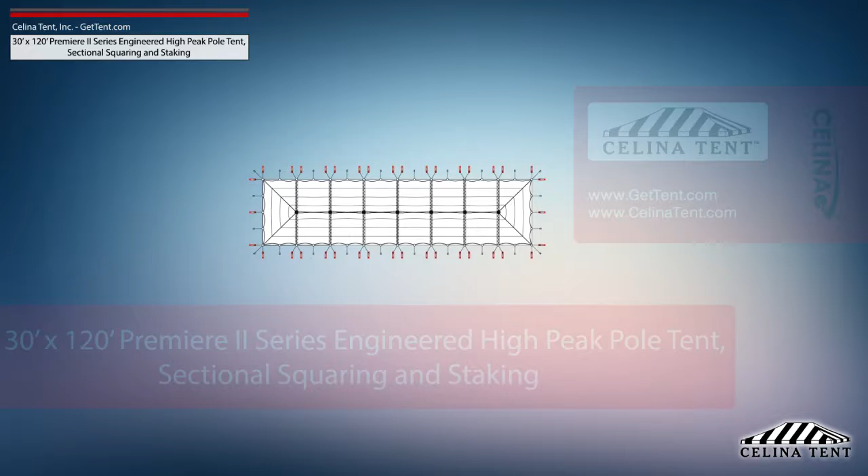gettent.com. This video covers squaring and 5-foot staking applicable to a sectional 30-foot by 120-foot Premiere II Series high-peak pole tent from Celina Tent. 5-foot staking is standard for tents with an eave height of 7 or 8 feet and would need to be adjusted for eave heights other than this standard.

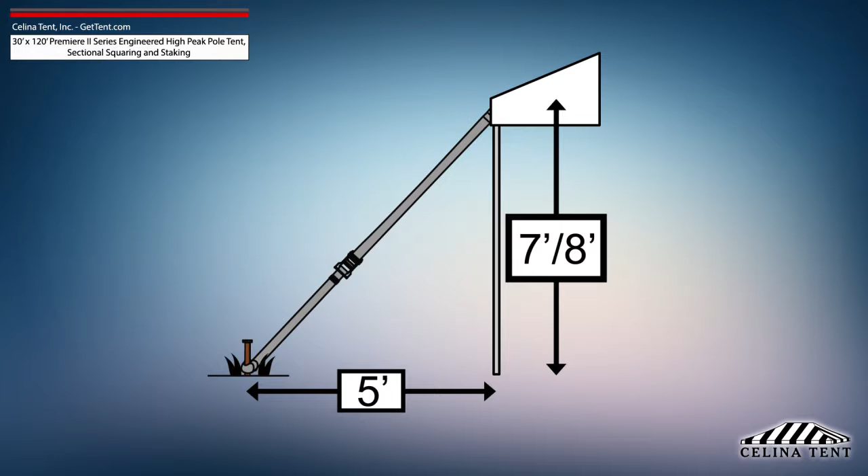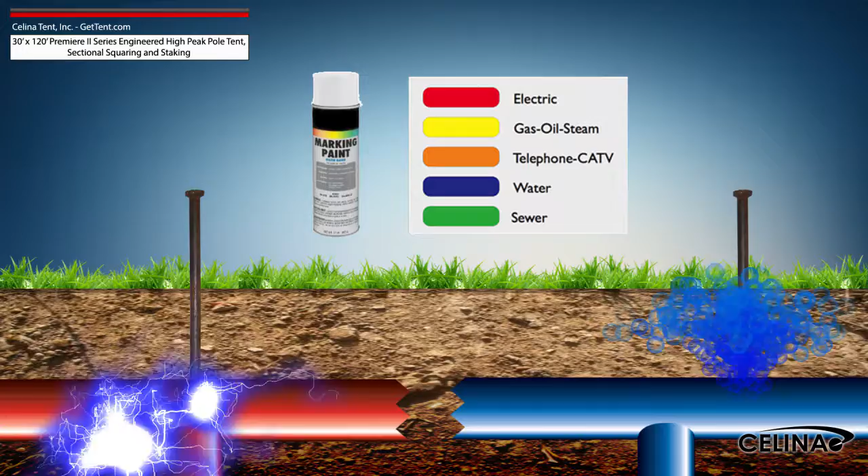Tent squaring allows the installer to accurately place all tent hardware and install tent stakes prior to beginning setup, and helps them avoid any marked underground utilities. Utilities must be marked by your state's local utility services prior to any tent installation.

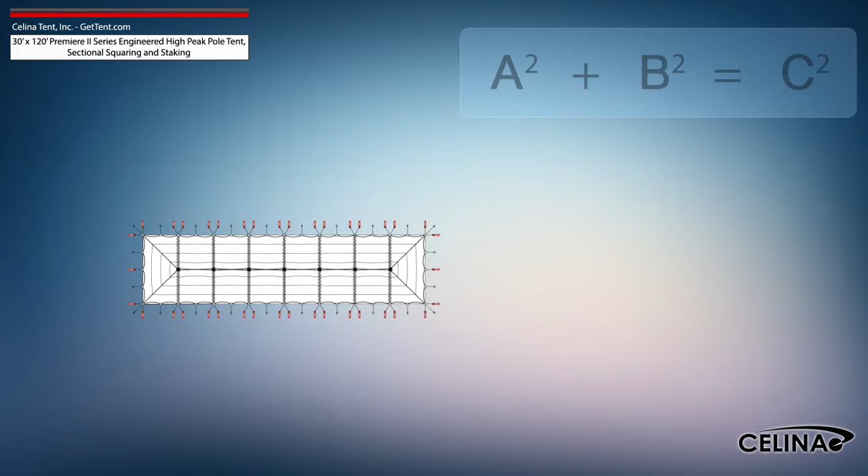Using the Pythagorean theorem and adjusting out for 5-foot staking, the entire tent footprint will be 40 foot by 130 foot, with a 136-foot diagonal length.

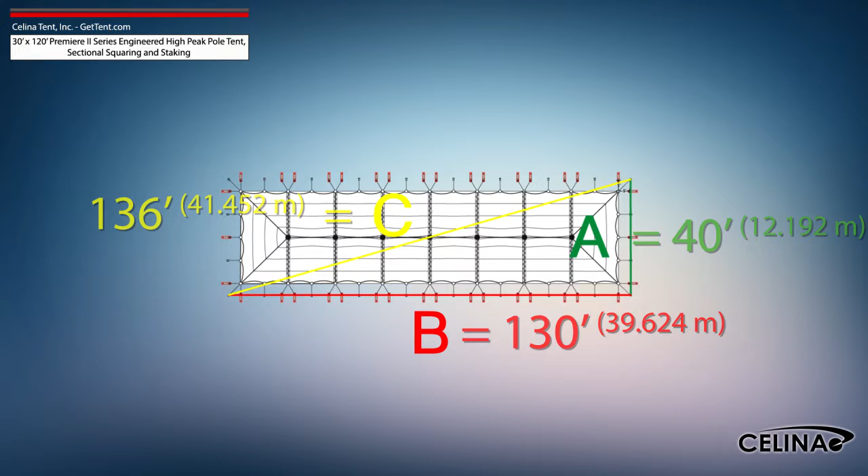Celina recommends that a 30-foot by 120-foot Premiere II Series high-peak pole tent receives a minimum of 107 stakes: 5 stakes and 2 stake plates for each corner pole, 1 stake for each side pole, 2 stakes and 1 stake plate for the side pole at the center of each end, 4 stakes and 2 stake plates for each side pole at lace line locations, and 1 stake for each center pole.

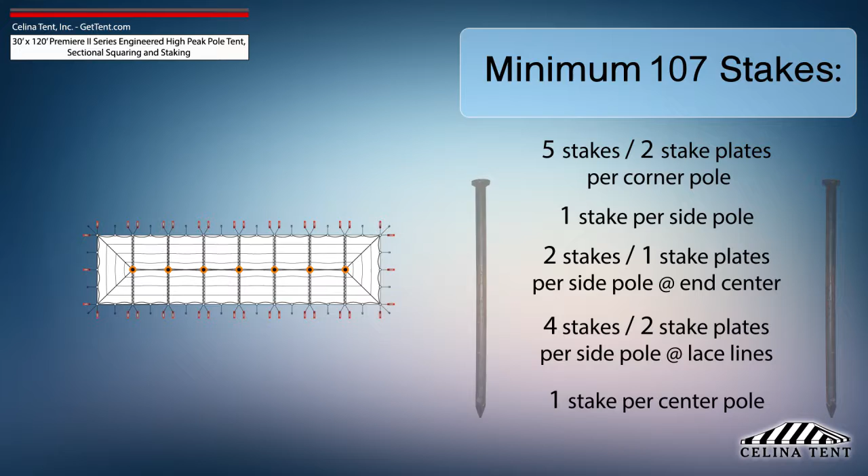This amount of stakes provides the minimum amount of security for a pole tent of this size. Additional staking is required for any site that doesn't meet optimal soil conditions. Tent staking is the most important safety procedure during tent installation.

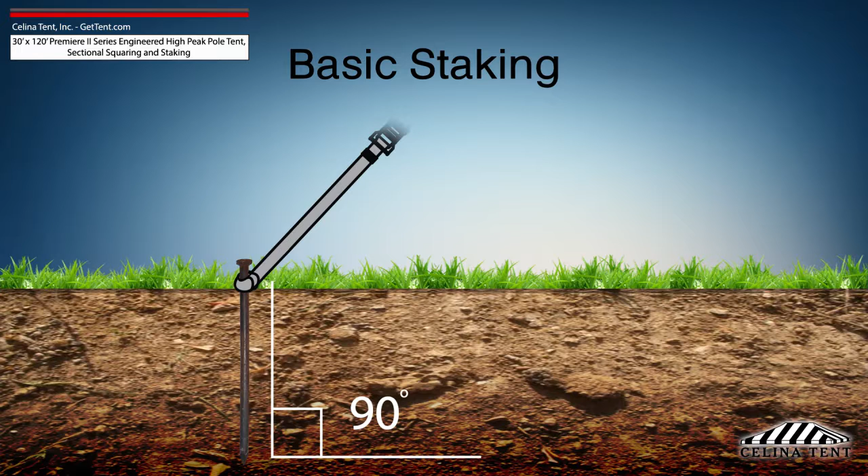Tent stakes should be driven vertically so that the stake is as close to the ground as possible with space to tie on a strap. Any length of stake protruding from the ground that is more than 6 inches will have detrimental effects on the holding power of the stake. Attach the ratchet strap or rope as close to the ground as possible to reduce strain on the stake.

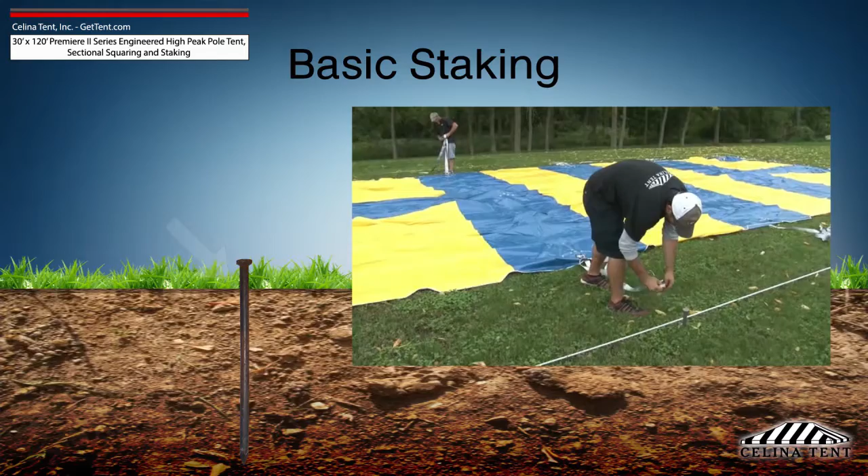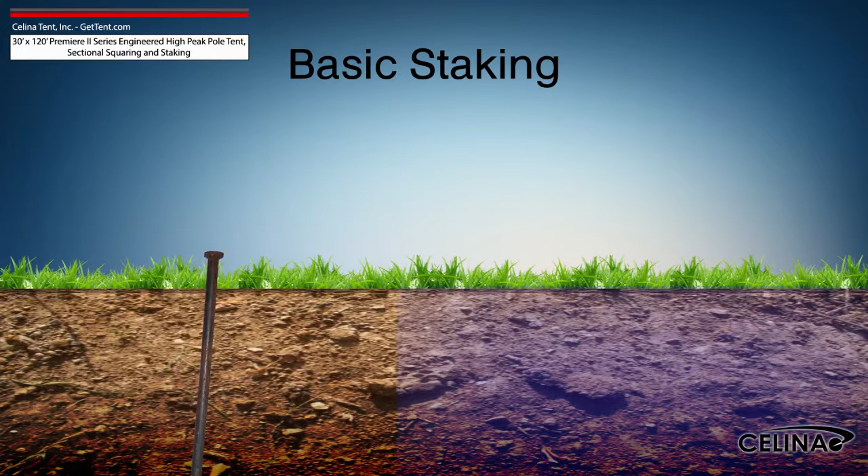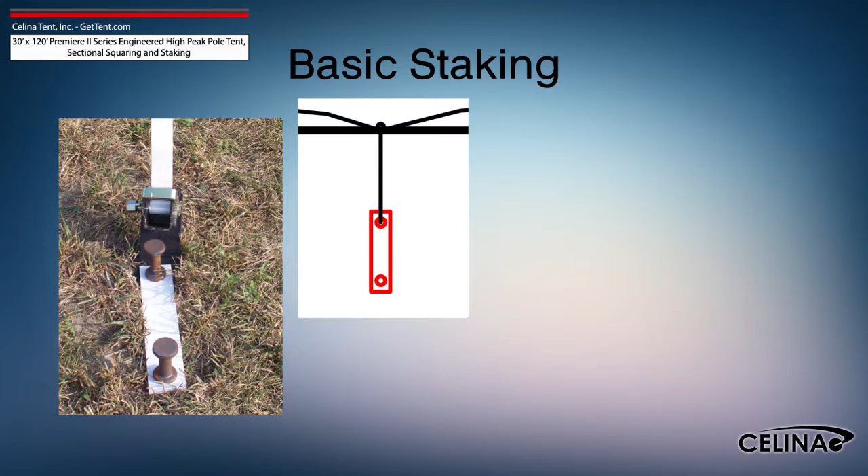It is the installer's duty to inspect the soil conditions and possible weather effects for the duration of the tent installation. For water-saturated or loose soil, more tent stakes are required to achieve adequate anchoring. Staking may be increased using dual stakes and a staking plate, or gang staking utilizing 2 staking plates and 3 stakes.